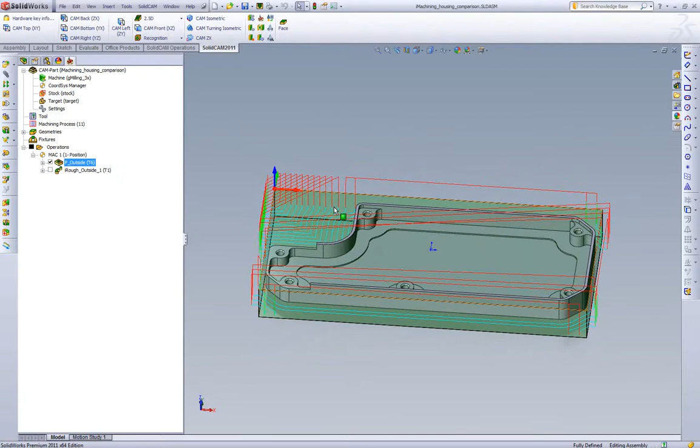What we have set up is we have a standard pocketing toolpath cutting the outside of our part. This is a standard parallel offset, as we can see, in one-way cutting. The second operation we have set up is an iMachining toolpath for that same geometry.

So let's go to the pocketing toolpath and let's pick some real-world feeds and speeds. What we have here is we have a 1/2" end mill, 4-flute. So let's say we'll start out with just a high-speed steel 4-flute roughing end mill, cutting steel.

So if we were to pick some real-world feeds and speeds, assuming we're not doing high-speed machining, if we were cutting steel, we'd probably run something around 100 surface feet and pick something around 4 thou chip load. This ends up working out to roughly 760 RPM and a little less than 12.5 inches a minute.

If we were using a roughing end mill, chances are we'd be able to do this cut in one depth of cut. It's 900 thousandths, and we'd be able to most likely get away with it. So what we'll do is we'll compare the cycle times for this feed and speed at one depth of cut, and then we'll also cut the depth of cut in half, and we'll do it in 2 passes and see what the difference is. We are using a 60% step over on this part.

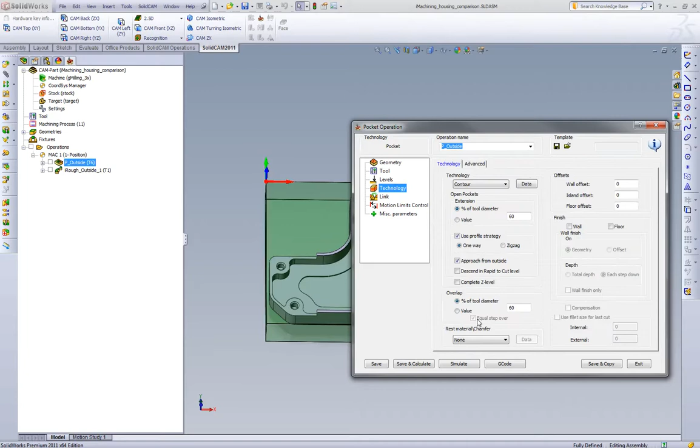So if we save and calculate and go to our simulation, we can see here we have our feed rates and our running time, and we'll just quickly play this toolpath. We see we end up with 13 minutes and 30 seconds, roughly 13.5 minutes.

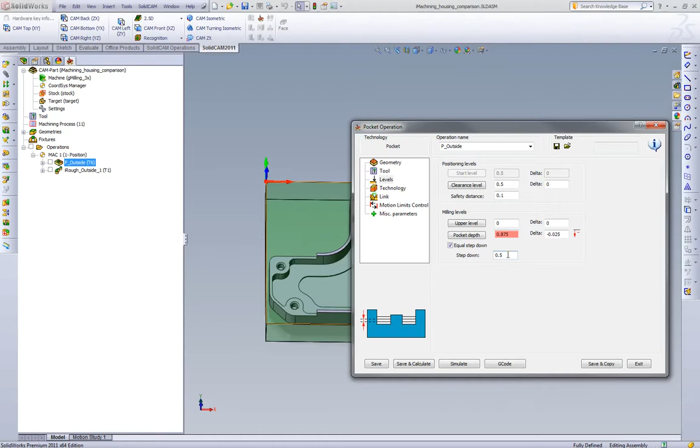If we were to change this cut and we were to use, let's say, equal step down and a half, which will give us 2. If we were to go and play this, we end up with almost 25 minutes worth of cycle time to machine this outside steel part. To give you an idea of the size of the part, it is roughly 12.5 inches by 6 inches long.

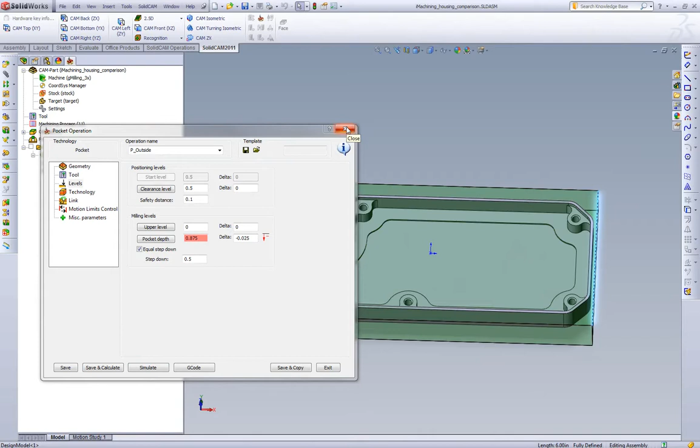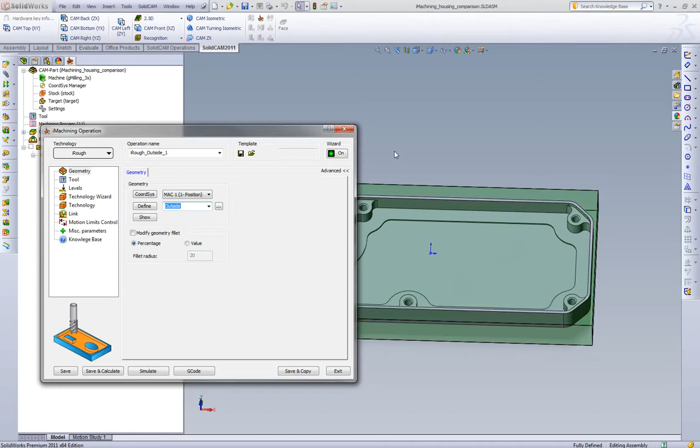Now let's go take a look at if we use those exact same feeds and speeds, the 763 RPM and the 12.5 inches a minute, with an iMachining toolpath, what are we going to get? Now most high-speed machining toolpaths on the market today will tell you that most of their strategies need to be using high-speed feeds and speeds to be more beneficial than the standard style strategies. In iMachining, we don't believe that.

So what we're going to do is we're going to disable the wizard entirely, and we're going to run our own feeds and speeds. So we're going to pick an RPM of 763 and a feed rate of 12.5 inches. Going to go to our technology. We're going to do one depth of cut. Since we're using a roughing end mill, we're going to maximize the step over, which at 80 degrees is 200 thousandths roughly. And since we're also trying to mimic what we get in parallel strategies, we're going to pick a bigger minimum cutting angle.

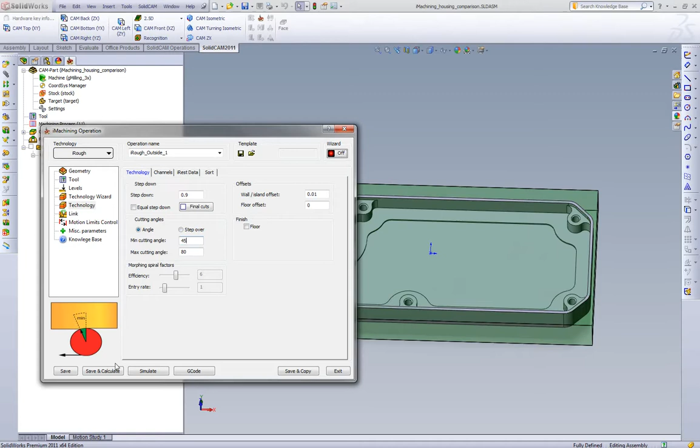We'll calculate this toolpath, run to our simulation, and we'll see what we get. We see the iMachining toolpath is 12 minutes and 7 seconds, roughly 1.5 minutes quicker than even the standard pocketing or offset strategy with the same step over, feed, and speed.

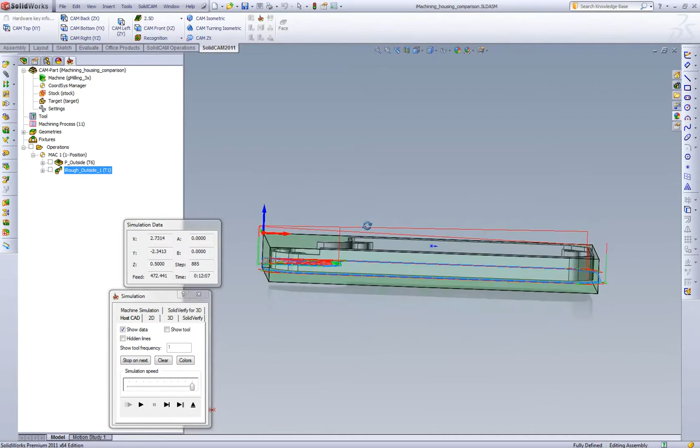Now, how does iMachining do this? It does this by a couple things. First, as we look at the toolpath, we see there's very little clearance and retract movements. Because iMachining is doing smart repositioning and always staying in the cut, we're not wasting any feed Z moves, and we're not wasting any clearance moves. So you're getting a very big optimization just by keeping the tool down inside the cut the entire time.

The second thing we do is, we know we're not always going to achieve the step over that we ask from the toolpath. And when that happens, we're automatically adjusting the feed rates to handle that. So if we were to start single stepping this, we can see in the beginning as it's entering the cut, we know we have less step over. So our feed rate's actually a little bit higher, and it gets up to 17. As we hit the full depth of cut, you can see we're right at our roughly 12.5 inches per minute.

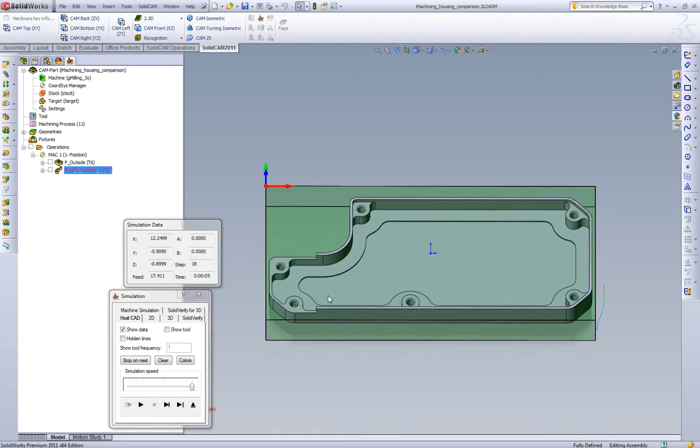So iMachining is being intelligent. It's getting rid of the repositions. It's staying in the cut the entire time. And it's adjusting the feed rate when the step over or the width of cut is falling below what we specify. So very efficient feeds and speeds, and you get a very nice toolpath.

This is also going to be better for the tool in the long term because the tool's also staying in the cut more. It's not entering and exiting as much as it would with standard pocketing or standard offset cutting. So this is a comparison of 13 and a half minutes to 12 minutes. Not a huge difference, but even using the same feeds and speeds that any shop is used to, we're going to see a benefit with iMachining.

And not to mention, when the toolpath is running out on the machine, as an operator, you're going to feel much more comfortable not having all of those Z clearance retracts and plunging all the time with your hand on the cycle start button when you're running the first piece. So iMachining also gives you a better feel at the machine because the toolpath is staying down and it's cutting more intelligently.

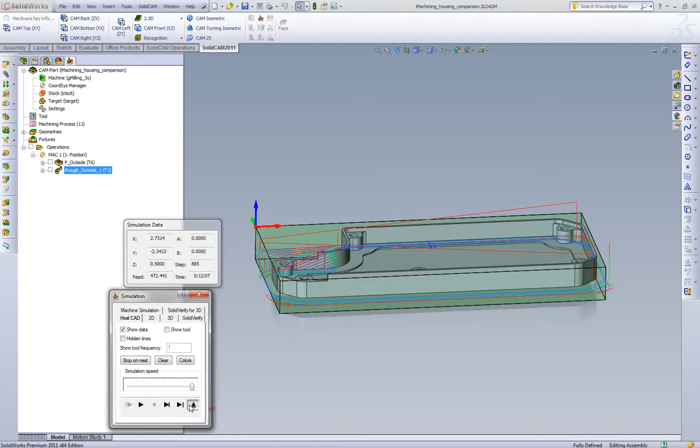Now let's also take a comparison of what happens if we were to try and do, let's say, high-speed machining with a carbide end mill. Our customers are using high-speed or carbide end mills today. So let's say we went back to this pocketing end mill. We're still going to use a 1/2 inch. We're going to still pretend it's a 4-flute carbide end mill. Now we're going to switch things up a little bit.

Now most likely if we're running carbide end mills in steel, we're going to run more surface footage, and we're also going to run shallower depth of cuts because we're not going to take the full 900 thou at that step over. So let's say we want to run something like 2500 RPMs. A 1/2 inch end mill at 2500 RPMs works out to 330 surface feet, which is a little on the high side for steel, but for people doing high-speed machining in steel, really not that high. Definitely doable. And then if we look at our feed rate, we get roughly 40 inches a minute. So 2500 RPM, 40 inches a minute.

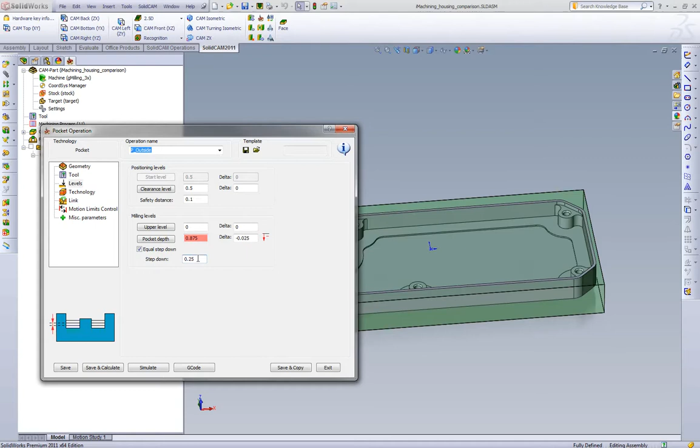We'll go to our levels, and we'll pick a 1/4 inch depth of cut. I personally feel that's a little heavy with a 4-flute 1/2 inch carbide end mill, but it really depends on your machine, the rigidity, the holder. So a 1/4 inch depth of cut is not unreasonable. Maybe it's a little high for some machines, and other machines might even be able to go a little bit deeper for sure. So let's calculate this toolpath, and we'll see what cycle time we get.

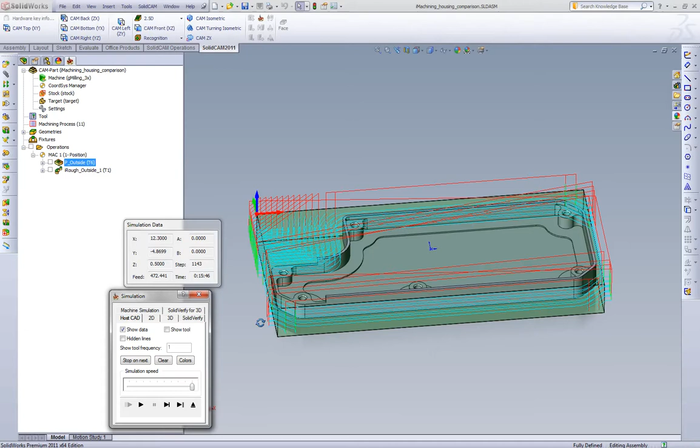So if we see here, we're sitting at 15 and a half, almost 16 minutes. So this is a cycle time at a 1/4 inch depth of cut at 2500 RPM and 40 inches a minute. We can see basically the same toolpath we had the first time. Now we're just going with a little bit shallower depth of cut, more RPM, higher feed rate.

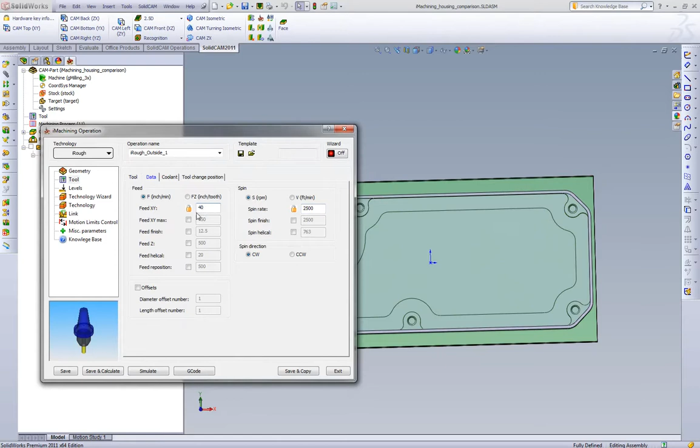Now let's go to the iMachining toolpath, and we'll do the same thing. So we'll go to Tool. We were running 2500 RPM. We're running 40 inches a minute. We'll also mimic the same step down, so we'll pick a 1/4 inch, equal step down, and we'll calculate the toolpath.

15 minutes and 53 seconds. So basically you got the exact same cycle time going between standard pocketing with high-speed machining and iMachining. Yet we're keeping the tool in the material the entire time. You're getting less wear from the tool entering and exiting, and it's also doing smart repositioning.

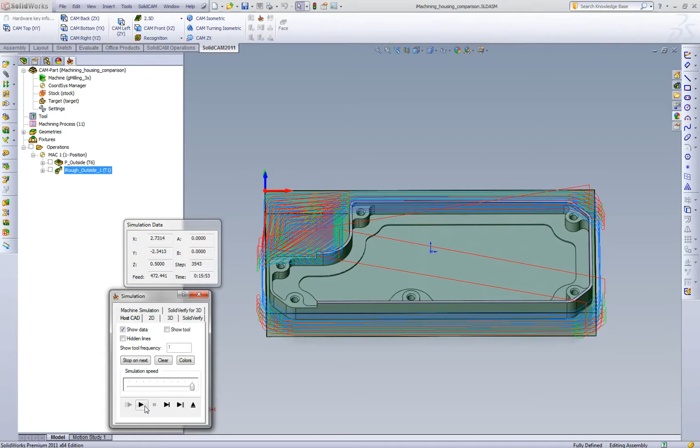Now let's do some comparisons on what iMachining's wizard would tell us to run. Because now that we're actually doing a step over control toolpath, we can take this thing in one depth of cut. Not a problem at all. So we're going to turn the wizard on and take a look and see what the wizard generates. So first, let's not go all the way up to level 8. Let's say we're trying to be a little conservative, and let's step down to level 3.

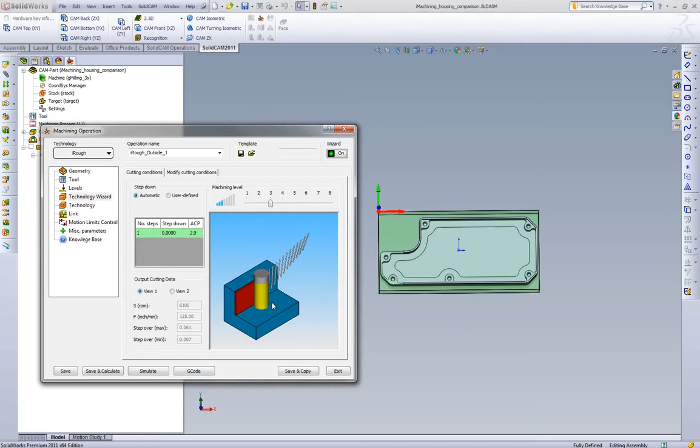Now, when we step down to level 3, a couple things we're going to notice here. iMachining, unlike what we were doing with standard pocketing, is going to do a smaller radial width of cut.

This is because now we're doing full depth of cut, so we want to shorten up the width of cut, so that way we're not getting into a heat condition. When we're also doing this, we're going to adjust the feed rate for chip thinning, so we're running a constant chip thickness.

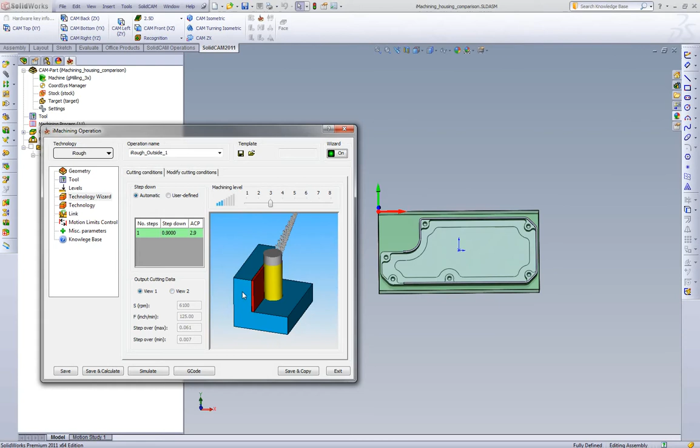Now if we look, iMachining does some different things than what we do in standard pocketing. When we're using carbide end mills, we're going to try and hold 2 thou and 7/10 of a chip thickness. So what this means is at the 61 thou step over, the 125 inches is going to meet that 2 7/10 chip load. Now iMachining is going to run up to 6100 RPM. This is going to be no problem with iMachining at all.

The biggest reason, as we know with standard offset style strategies: when does the tool make the most heat? When it goes into the corners. We've all seen as the toolpath runs into the corner, you can see it smoke up. We've all basically had the coolant just dripping on it, and we know as it's cutting around the outside, it's nice and fine. As soon as it goes into a corner, the tool starts to smoke and the coolant evaporates, because the heat generated in the corner is what's dictating the entire toolpath for us.

Even though we knew if we were running in a straight line, we could run 6,000 RPM in steel, that wouldn't be an issue. Not at this step over, not at that depth of cut. But the issue is, in standard pocketing and standard offset style strategies, we're getting too big a step over in the corner, chip thickness is going through the roof, and we're slowing down the entire toolpath because of it.

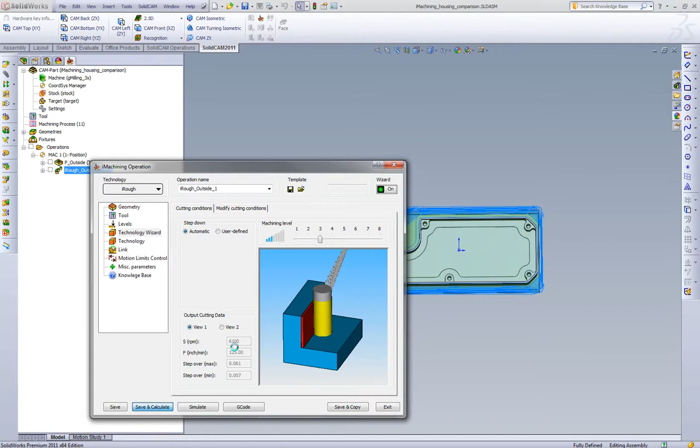So if we looked at what iMachining would do for this strategy at this step over, we'll see what time we get. Now you're going to see a lot smaller step over, but we can see what happens. We go all the way down to 4 minutes of cycle time with iMachining. That's still a very, very conservative feed rate and RPM with iMachining. We do have to remember, this is much higher than the 2,500 RPM we were running in standard pocketing, but we're limited in standard pocketing and offset strategies because of the corners.

Now, even if we were to take iMachining down to, let's say, level 1, which would get us down to roughly that 2,500 RPM range, a little less. And as we say, level 1 is here to be very safe. This works really good when you have a part that's maybe hanging out in there and you really don't have a lot of cutting force, or your tool is hanging out very far.

Now even if we do this, we see we get the 17 minutes. So that is 2 minutes more than what the standard rough cut did with the standard offsetting. Yet we're actually still running a little less RPM and feed rate than we were in the pocketing, because this is only 2,200 RPM as opposed to 2,500.

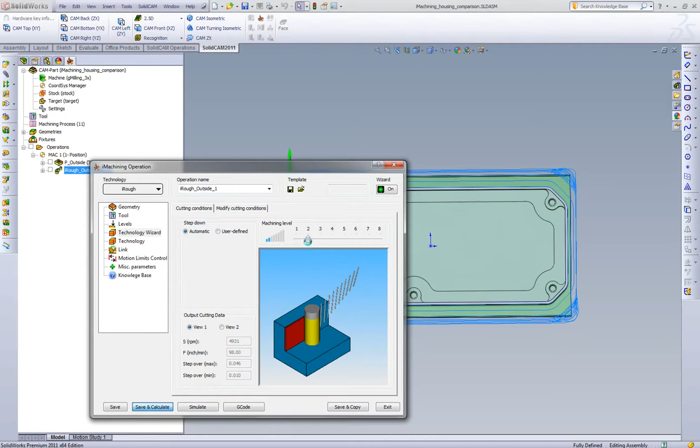So you can really see that with iMachining, we're giving you a lot of choices here with the feed rates, and the user doesn't have to worry about all that synchronization. What chip load am I running? What's my feed rate for that step over? iMachining is taking care of all that. And if we were to calculate level 2 and just see our feed rate there, we go down to 6 minutes.

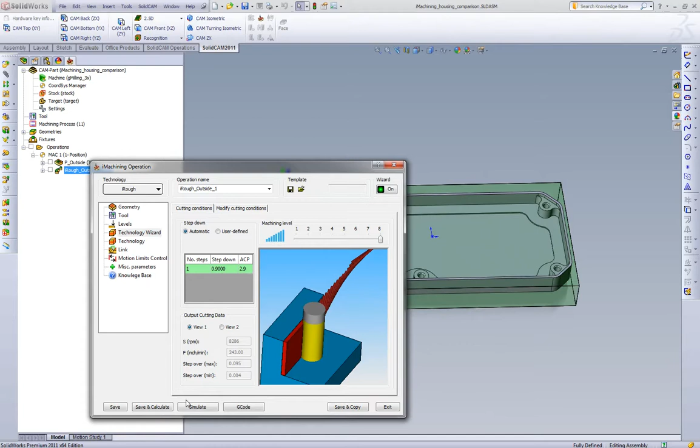And for the really aggressive customers, we can go all the way up to level 8. You can see level 8, we get a little bit wider cut. We went from 61 thou to 95, and now we're up at the 8,000 RPM range. If we calculate this toolpath and simulate, we go all the way down to 1.5 minutes.

So with iMachining, you have a huge range of strategies that you can go with. You can run the same feeds and speeds that you run normally, and you'll still get better tool life, more efficient cutting, and better on the tool and the machine. With SolidCAM's iMachining Wizard, even level 1, 2, or 3 is going to beat the cycle time of what most customers are doing with machining today. And it's very easy, as we see going up to level 6, 7, or 8, to achieve those feed rates, because iMachining is managing all of this stuff.